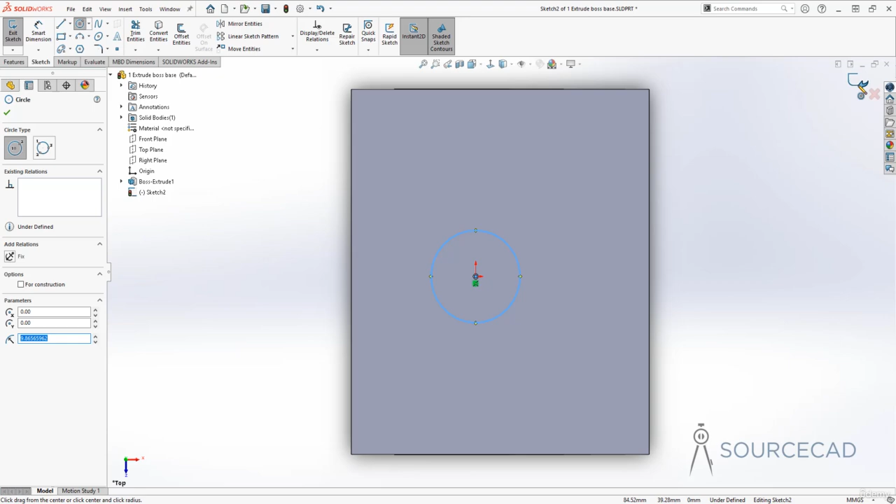Okay, so we can see the top plane, and if you make this sketch, it will be made exactly on the plane which we selected. So let's go to the circle and maybe using this as origin, let's make it like this and exit the sketch. All right, here we have the circle. Now we'll extrude this. So I'll go to feature, extruded boss base, and I'll select the circle.

Now so far very easy, very simple, but now let's go to these two main options that we'll be discussing, the from option and the direction option. Inside direction we have several options here. In the from also we have several of these. So we'll talk about these one by one. Let's start with from. Now currently in the from option, sketch plane is selected. So all the selection will start from the sketch and the dimension will be measured from that sketch.

However, if I change that to, let's say, offset, then there will be a new option here called offset, and now you can add an offset distance. For example, here I can type 5 and tab key, and now there will be an offset of 5 units between the original sketch and the point from where this actually starts extruding.

So currently the offset distance is added on the top of this sketch surface, but if you want to reverse it, just click here, and now the offset is 5 units just underneath this. So still it will extrude it in this direction, but the offset will start below this sketch plane. So if I, let's say, add a height of 30 units, it will be 5 units underneath this, so it will start from here. That's the offset.

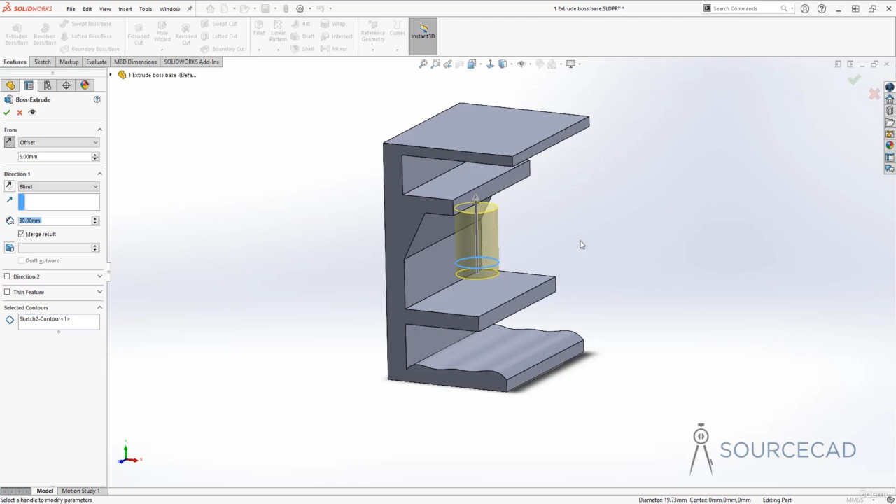Now the next option is vertex, and if you select vertex, SolidWorks will let you select a vertex and the extrusion will start from there. So now I'll maybe select this vertex, and there it is. The extrusion will start exactly from this vertex right along the plane of the vertex. So what other options we have?

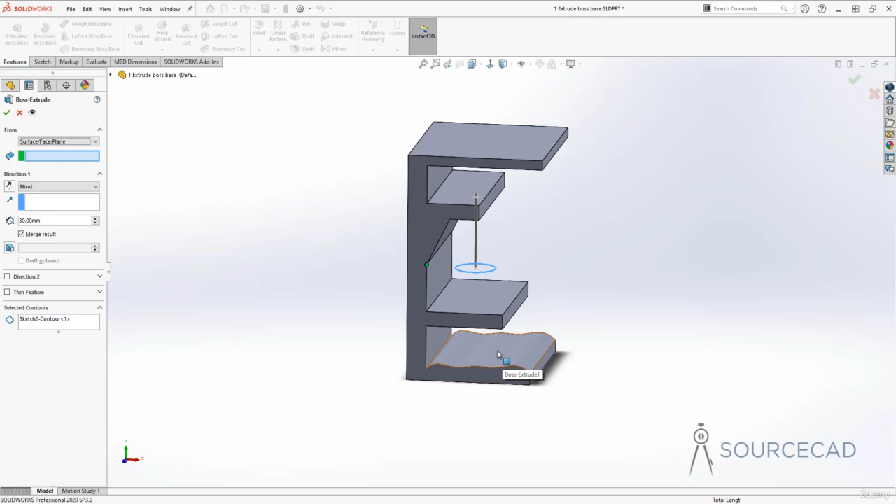Well, surface. So in this case you can select a surface and it may or may not be very smooth. So for example, in this case we can even select this kind of surface. So here I'll select this and the extrusion will start from here. It will just use this sketch as a reference. So we can now add a height. Any height is just fine.

So I accidentally moved this completely and changed the face. So I'll just select the face and I'll select it one more time. Now using this arrow, I'll add height. So that's how you can change these options to change the place from where the extruded sketch will start.

Now the next feature, which is direction, will decide the end point of this extrusion feature. So in this case we are extruding it blindly using the dimension, so that's why we have this blind option selected here. Now if you want some other option, for example, let's say we want to extrude it all the way up to the last object, then select through all, and there it is. It will extrude it all the way up to the last object.

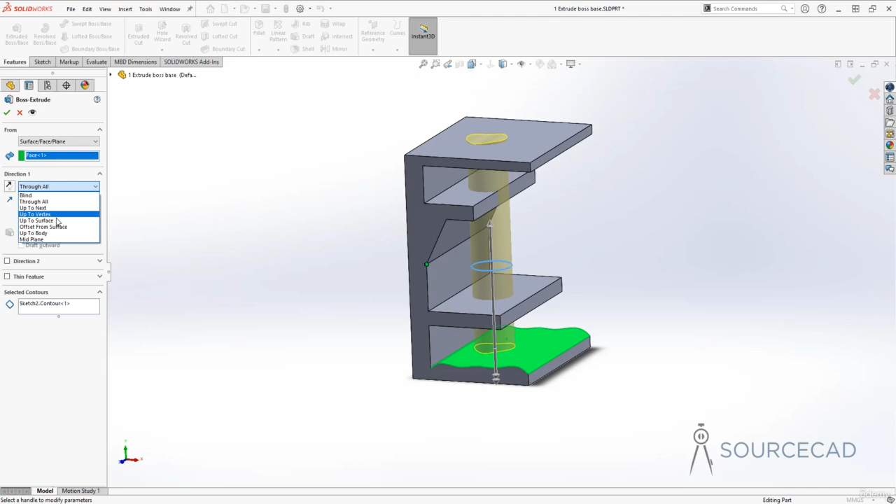Now in this case it is still using this surface as a reference, so it is starting it from here and extruding it all the way up to this, and that's why it has this kind of wavy surface, because it's following that. Now if you don't want it, then you can also go to this through all and select up to surface, and then select a final surface, and it will just extrude it up to that surface. There won't be any kind of waviness right above that, so it will just end the extrusion right here.

Now in this case I'll go to this from option and I'll simplify it. I'll select sketch plane so that the extrusion starts exactly at this sketch plane, and now still we have up to surface selected, so maybe I'll just keep this one selected, and in the face 1, which is this one, I'll select this. And now the extrusion will start here and go up to the surface.

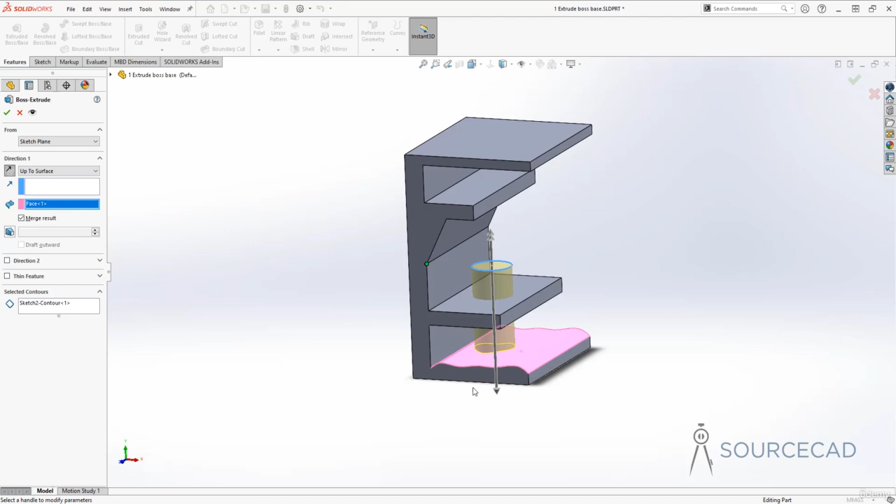So it will just decide the end point of your extruded face or the extruded object. So what other options we have? Well, we have seen the through all. Now up to next. Let's select this, and now this happened. Since we are extruding in the downward direction, now it will just start extruding from the sketch and extrude it only up to the next available surface, which is this one.

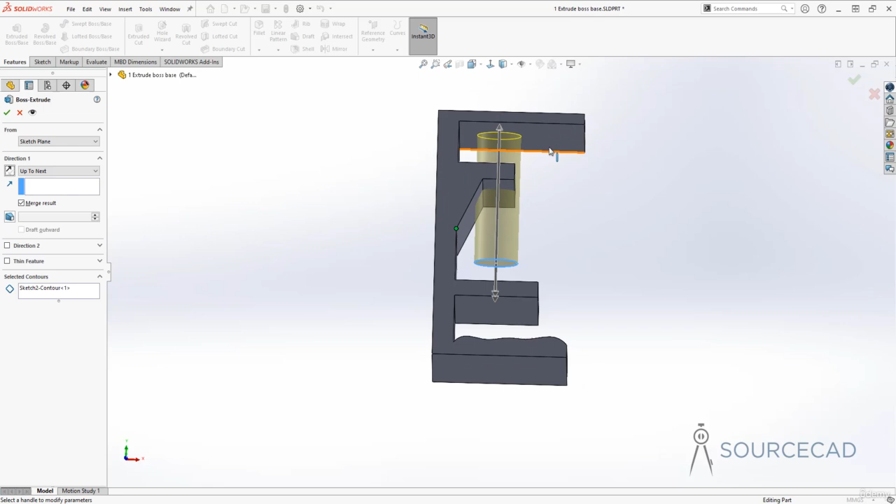If however you reverse the direction, which I'll do here, it will extrude it up to the next available surface. It did ignore these surfaces because it's not completely intersecting this object which is outside that surface. So the next immediate surface for this will be this one. So it will extrude it up to that.

Now we have already seen up to vertex, so still, if you want to, here it is, up to vertex, and then select a vertex and it will just extrude up to that. So here I'll click on this vertex and it will extrude only up to that vertex, even when it is slightly beyond that plane. So it's just outside that plane, still it will just extrude it up to this vertex.

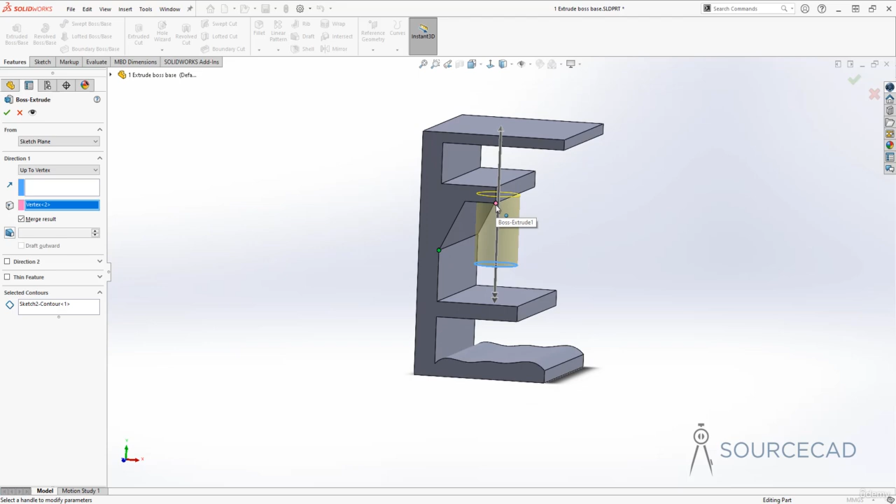Alright, up to surface, you know about that. You just need to select a surface, any kind of surface is fine. Even you can select this surface if you want to. So if you select this surface, it will just extrude it with respect to this, exactly like this. It will take that angle.

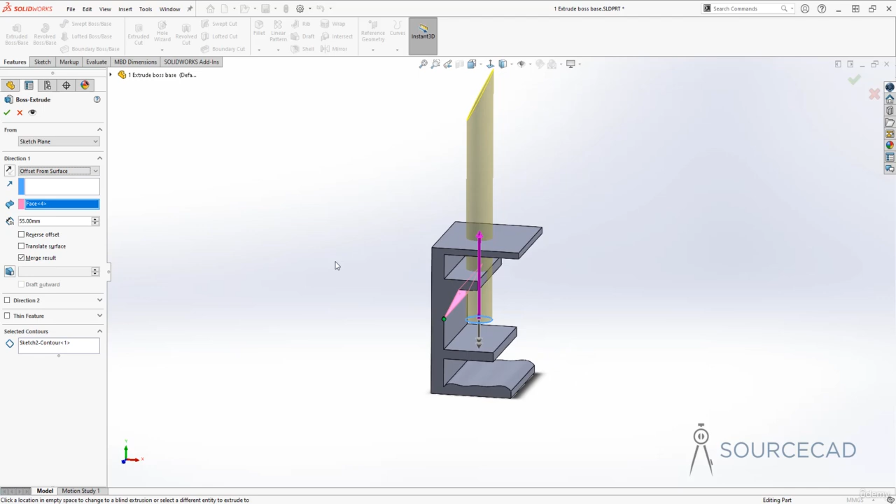Now, if you select offset from surface, then you can specify a final surface and the offset distance. It is huge right now. So I'll change the face. So the first thing that I'm going to change is maybe this. So now it is extruding only up to this surface, but the gap is really huge. That's offset gap. I'll decrease it to maybe, let's say 5. And there it is. So now this will extrude up to the surface, but it will keep an offset of 5 units, which we have specified here because now I've selected offset from surface.

Now you can also reverse the offset simply by using this reverse offset option, and now it will go beyond that plane up to 5 units. So beyond that plane, 5 units up, that's this. This is the point where it will reach. So I'll just uncheck this.

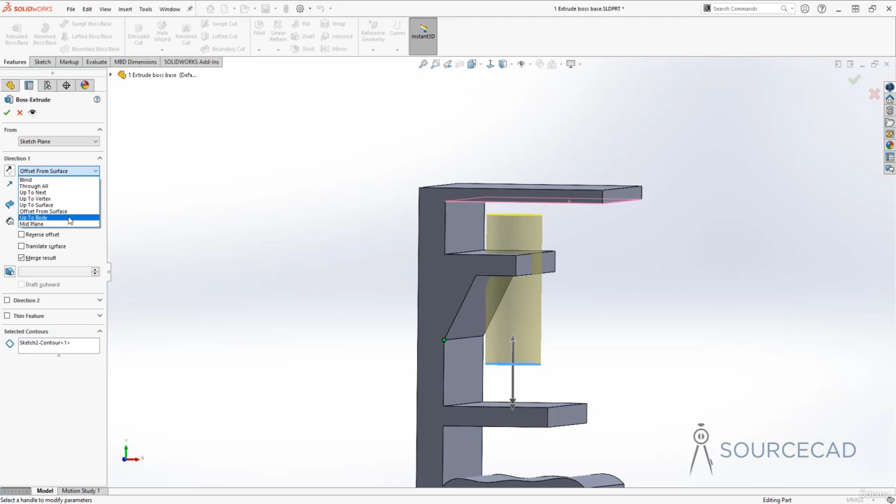And then we have up to body. Now in this case, if you have several bodies in your drawing, you can select a body, it will extrude it up to that. In this case, we just have one, that's this entire body, so it is not relevant for our current example. So I'll leave that.

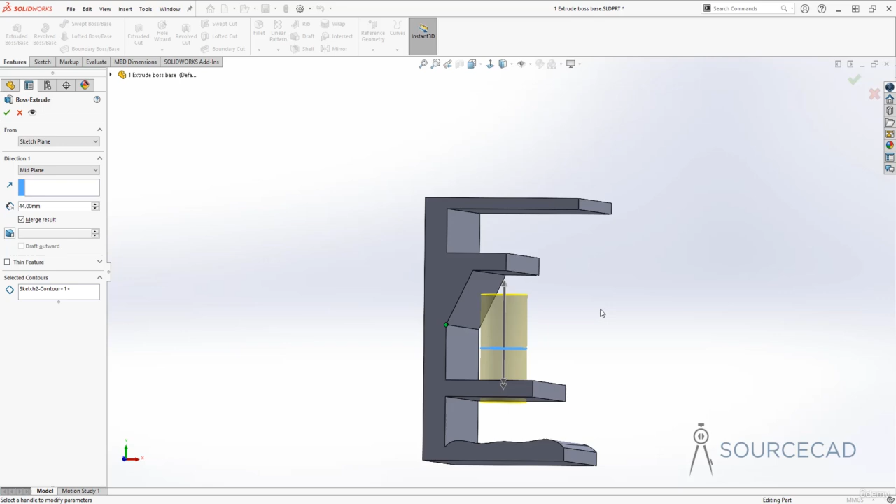And then finally we have mid plane. Now selecting mid plane will ensure that direction 2 simply disappears and only direction 1 will decide direction 2 as well. So you just need to specify one direction and the features here, and the same feature will be applied for the second direction too. For example, direction 1 has 55 units. So here I'll just change it to approximately 40,

and as you can see, it's moving 40 up and 40 down. Not only that, if I add a draft angle, it will be equally applied above and below that sketch plane. So that's the mid plane. Once you select that, it will use that mid plane as a reference and it will extrude it above and below the mid plane equally.

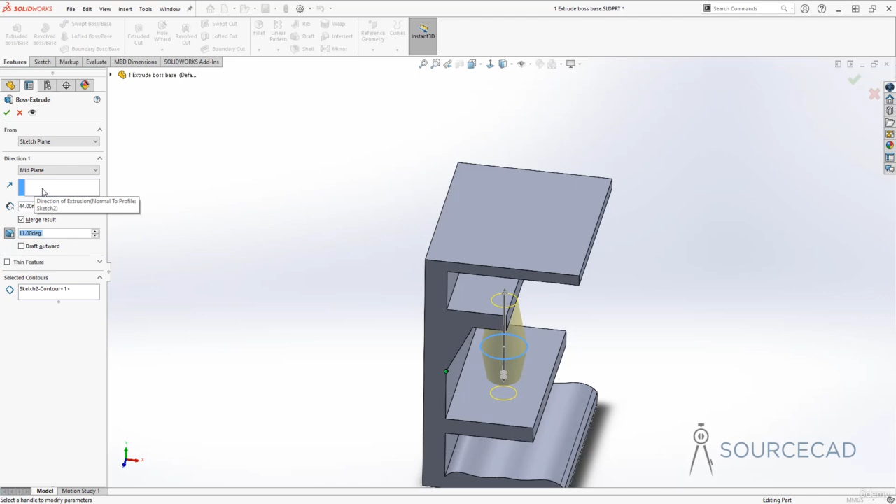Now we have an option which is called direction here, which we did not use so far. So first, let's make this very simple extrusion. So I'll just go to this drop down, I'll select blind, and draft feature, I'll deactivate that as well, so that we have this. Now I'll use this direction feature, and using this you can specify a direction of extrusion. So by default, SolidWorks will extrude your sketch in the perpendicular direction. So it will just start extruding in this way.

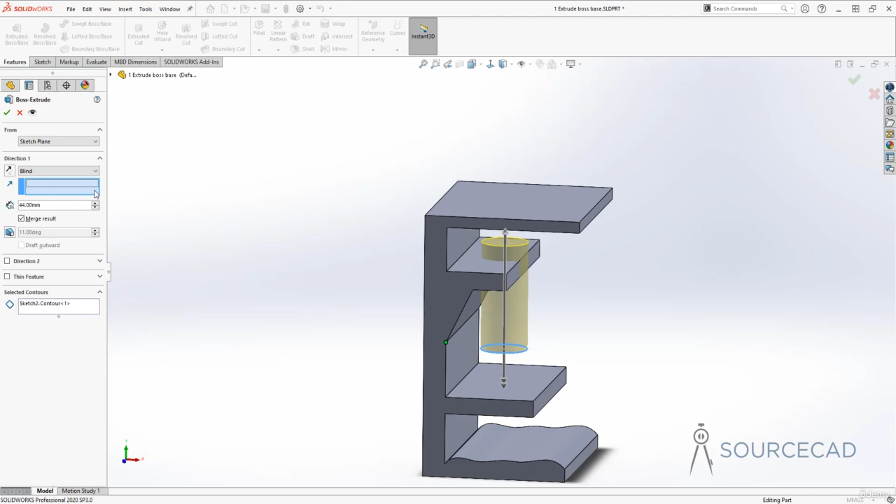But if you want to specify a direction, check this box and click on any direction line, for example, this edge. And now it will use that edge as a reference and extrude it in that direction. You can still increase or decrease the size of your extrusion here.

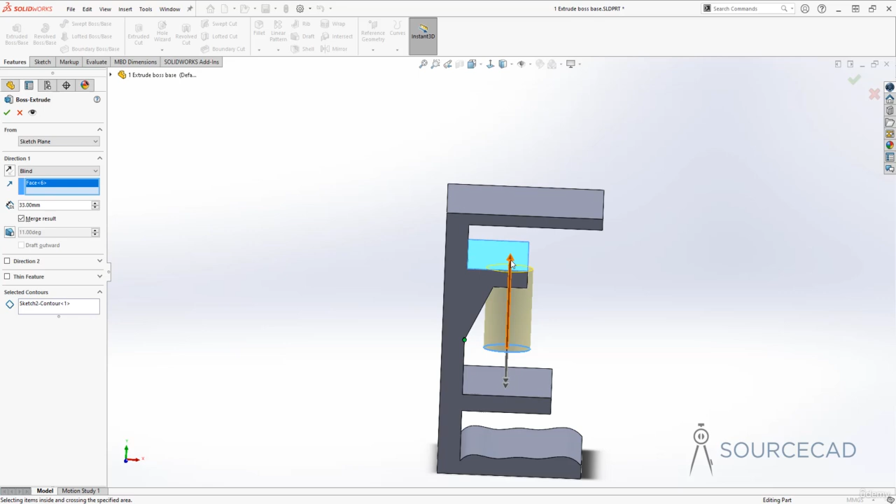So with that, I'll now go to this blind option. I'll just clear this direction and maybe I'll just move it all the way up to this, and here I'll make sure merge result is checked and I'll click OK, so that we have this final body which will merge with this one. And that's how you can create extruded bodies.